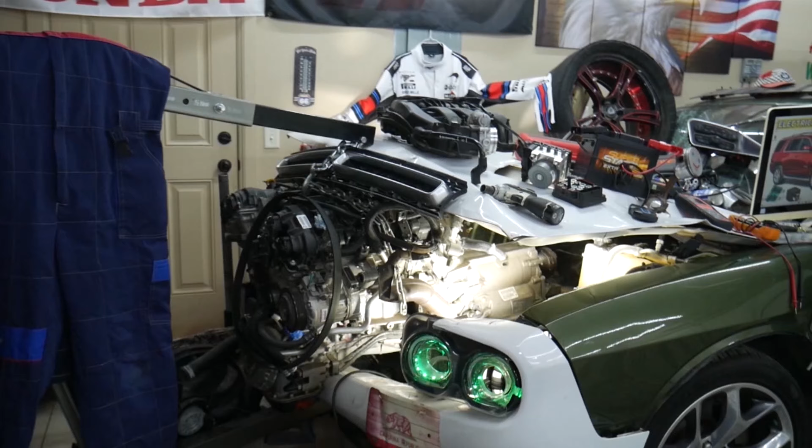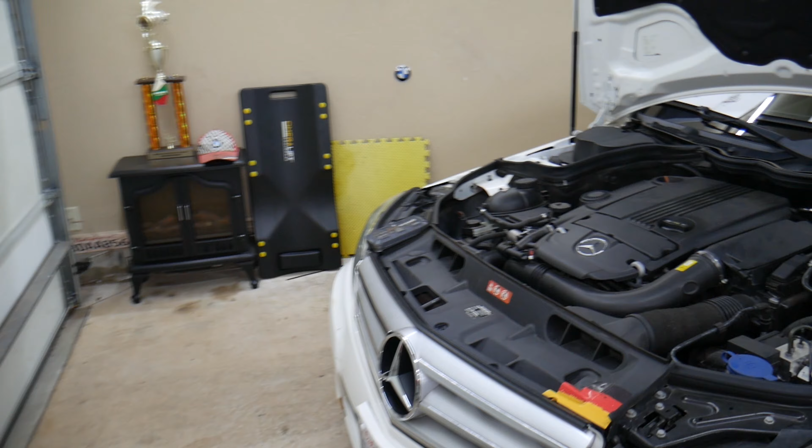So guys, what we'll do now, we'll be working in two fuse boxes. The first one, the BCM fuses and relays on the Mercedes C-Class W204, we need to open the hood. Watch how Mercedes made it quite convenient for us to open it all the way.

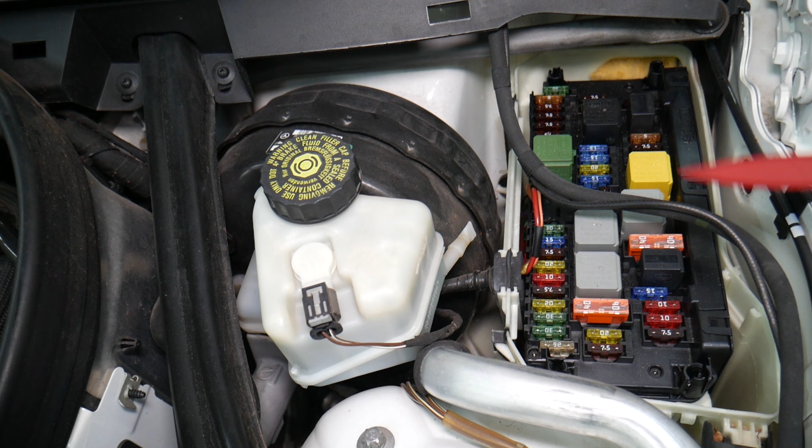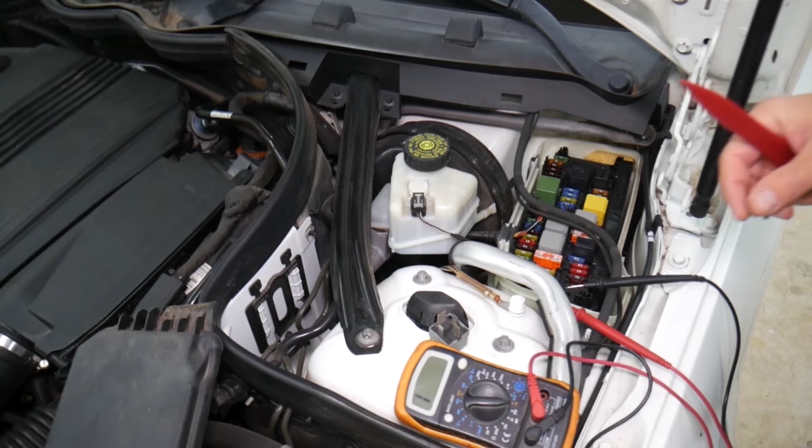Before we continue, let's explain quickly why it's always a good idea to test fuses and relays, guys. That way you do not spend money on diagnostics, parts, and repairs you may actually not even need.

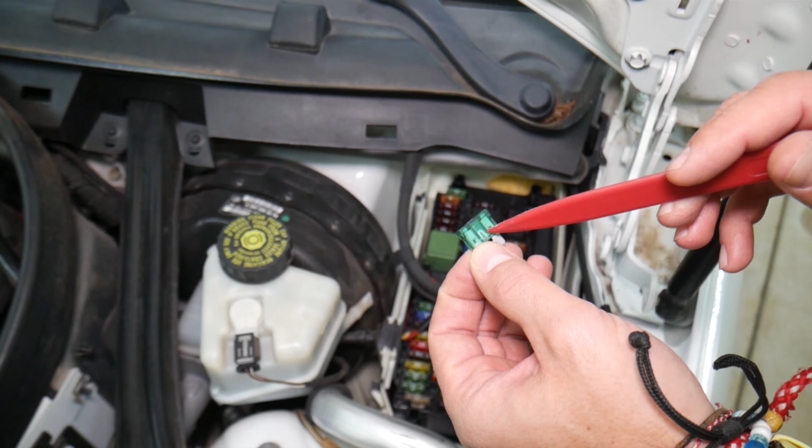So, guys, you have different kinds of fuses and relays. We're talking about the maxi fuses, standard fuses right here. You have, watch how many different kinds of relays as well. Now, these fuses, sometimes you can clearly see if a fuse is burnt or not by looking at the element. But sometimes it's really sneaky, they can burn here on the side, it's hard to see. Some fuses will not be visible as well.

And we had people that would spend thousands of dollars in repairs, replacing modules, even engine computers, when all they had to do was check the fuse. They assumed they had a good fuse, pulled it out, looked at it, and assumed it was good.

But guys, you can easily test these fuses, and most of them even have terminals on top that allow you to check them with a voltmeter and find out if it's good or bad. You see, that's a good fuse. If it's blown, like this one here, nothing, check this thing out, no connection. One next to it, okay, right here, let me get a good contact point, that's a good fuse, guys. You can see you can test them. Now, relays are harder to test, but with the voltmeter, fuses are super easy to test.

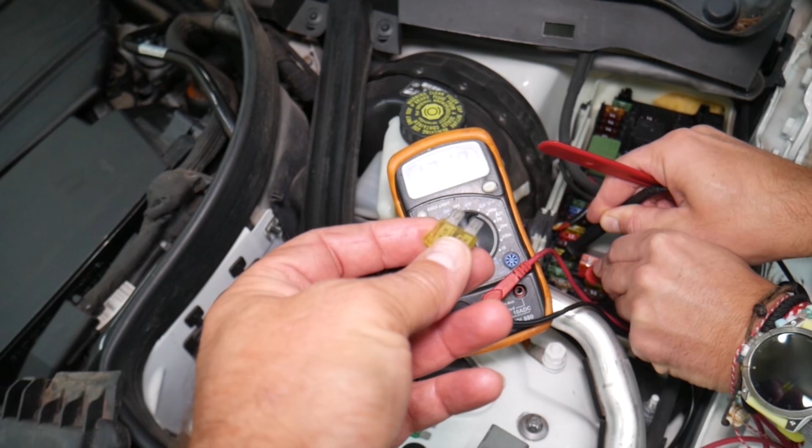All we have to do is set it on the ohm resistance setting, and you can find out if it works or not. For instance, that one was the good fuse. You can see it's going to go down to 0 ohms resistance, or you can go ahead, remove it, and test it the same way. It should have 0 ohm resistance.

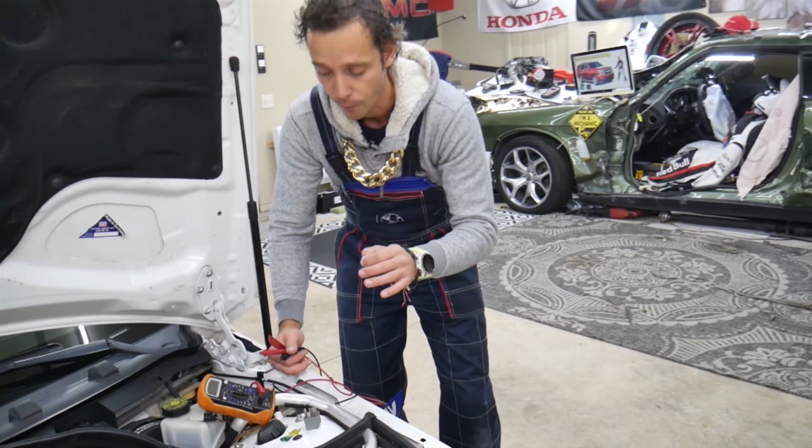So let's start now. Here is what we need to check. The first fuses coming into that fuse box are fuse 1, 2, 3, 4. Then you come to fuse number 5 right here, that fuse will need to be checked. Fuse number 6 will be right next to it. Then you need to check fuse number 23, which will be that 20 amp fuse right here.

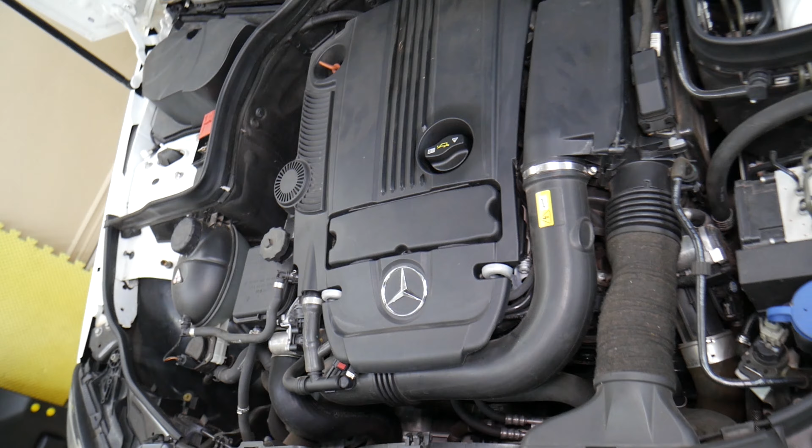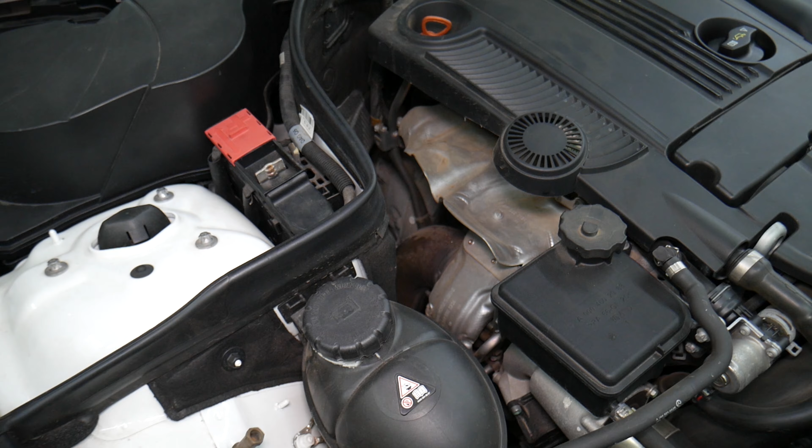Next, we need to check more fuses in a fuse box that's hidden, a very important fuse box. That's your jump starter terminal right here, and underneath is what's known as a pre-fuse box. Most people do not know, but you have up to 15 different fuses in that box for very important engine management functions. If something goes wrong here, your car may not work at all, so you need to be aware of that.

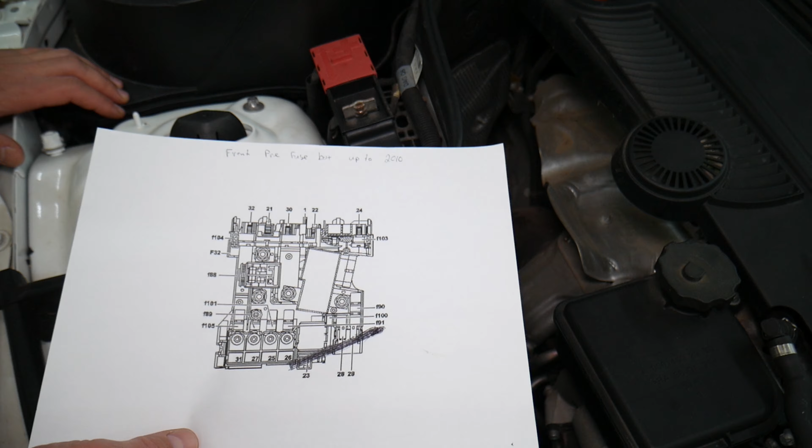We'll make a video on how to replace the pre-fuse box, how to open and replace a fuse in a Mercedes W204 pre-fuse box as well. There are 3 different kinds of fuse boxes depending on the year and options. If you have the pre-facelifted version, which is up to year 2010, here's what we need to check.

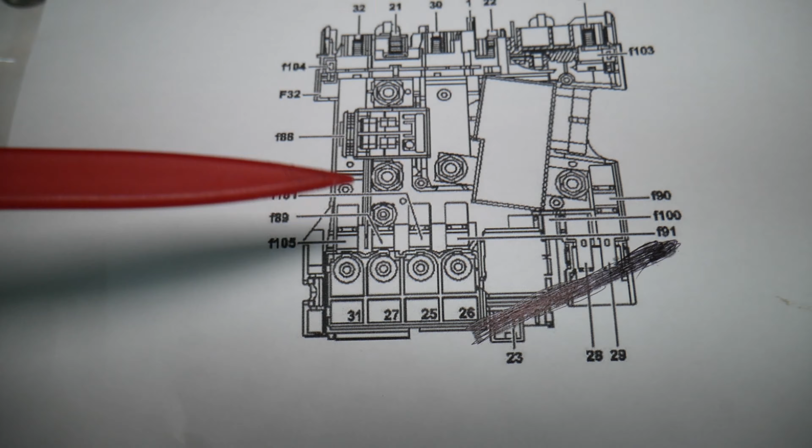Here we need to check fuse number 100... let me see, one second. Okay, fuse 89, excuse me. Fuse number 89 will be right here, that fuse needs to be checked. You will need to check fuse number 101, the one next to it. You need to check fuse number 105, and 104 right here. These 2 fuses as well will need to be checked.

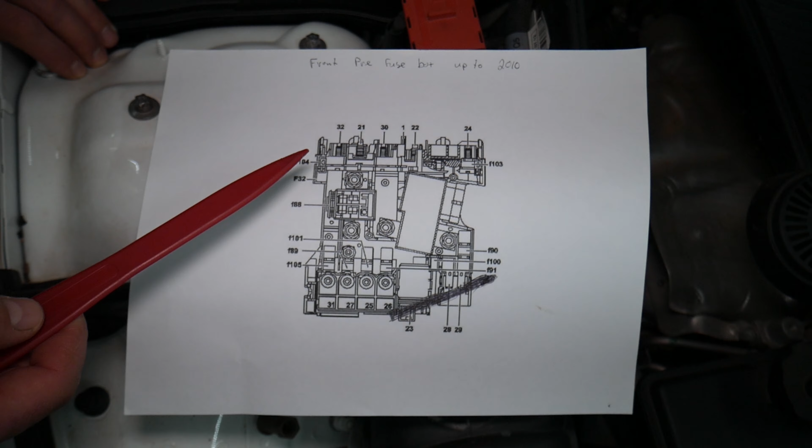Also, you need to check fuse number 90. Let me see where exactly fuse number 90 will be... right here, okay, that fuse will need to be checked as well.

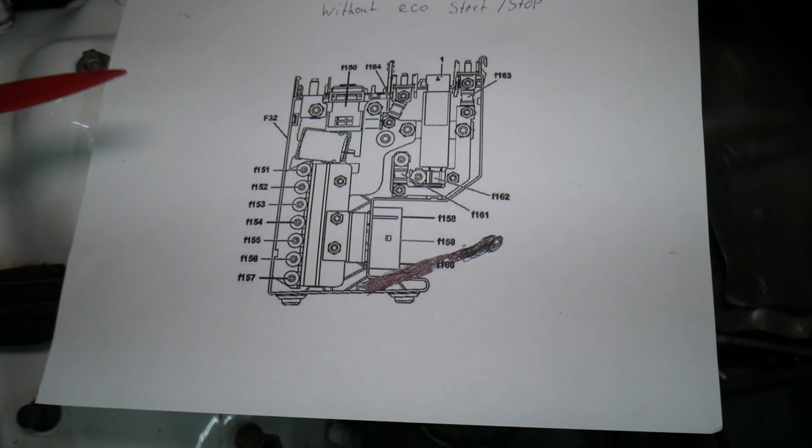Now, if you have one that's after 2010 without the eco start-stop function, you will need to check fuse number 163 right here, 164 right there will need to be checked, and also you need to check fuse number 161, this one here. And in addition, check fuse number 152, right there.

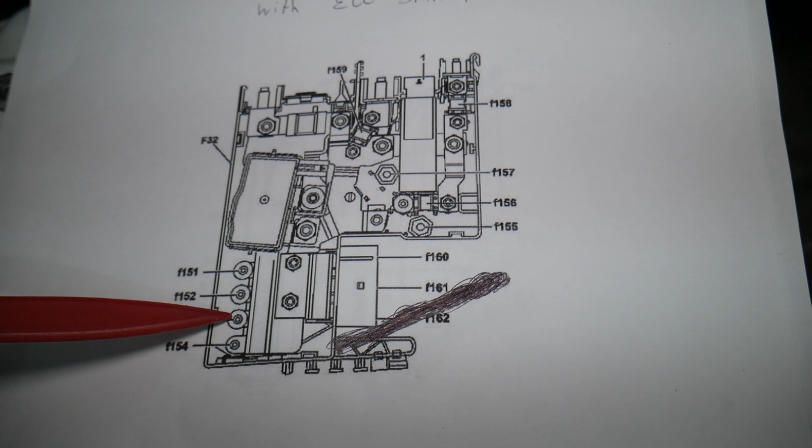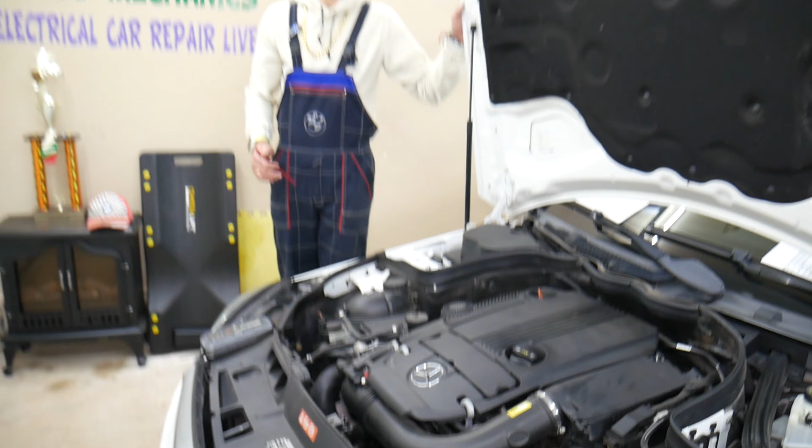If you have the eco start-stop function, you need to check fuse 152 again. Then you go to 154, 153, and 156 right here, that fuse. 158 next, that one here. All these fuses are for the BCM, the body control module, that you will need to check on your Mercedes W204.